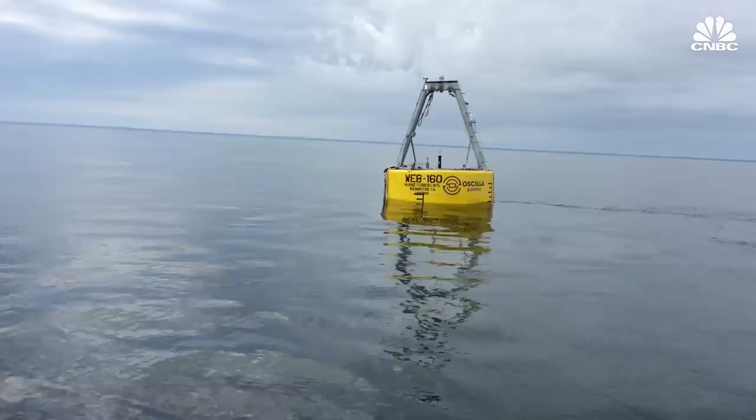As the nation's first full-scale, grid-connected test facility for these technologies, called PacWave, is set to come online over the next few years. PacWave really represents for us an opportunity to address one of the most critical barriers to enabling wave energy, and that's getting devices into the open ocean.

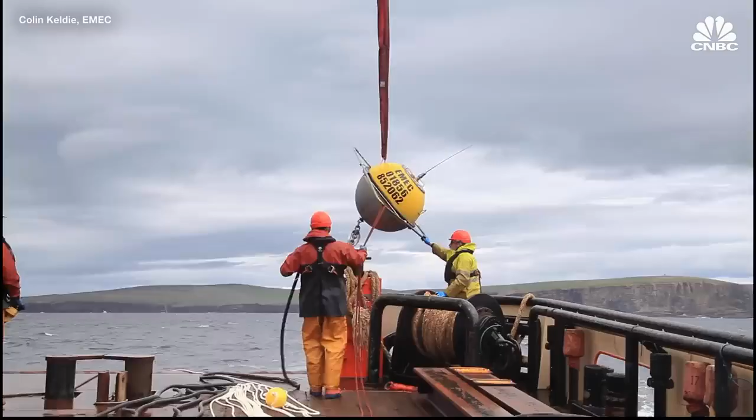That will help the U.S. catch up with its European counterparts, who've been testing wave energy devices off the coast of Scotland since the early 2000s. But while many prototypes have been developed, it's still unclear what technology will prove viable for grid-scale electricity production. There are just this vast array of approaches to turning oscillatory motion into ultimately electrical power.

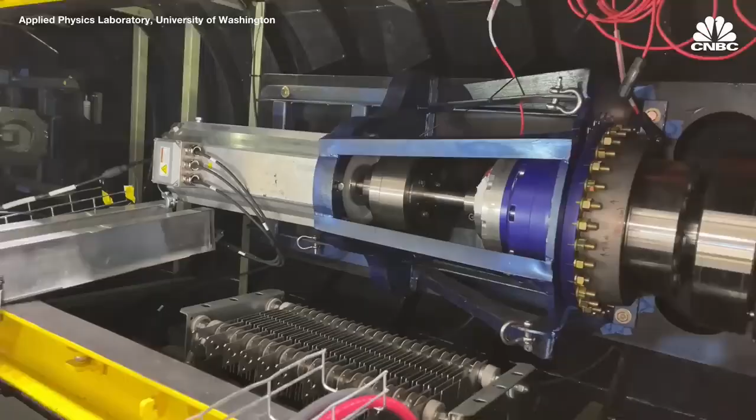We spoke with a number of companies pursuing different technologies and learned how this emergent energy source could help us transition to an all-renewable world, if we can get it to work at scale.

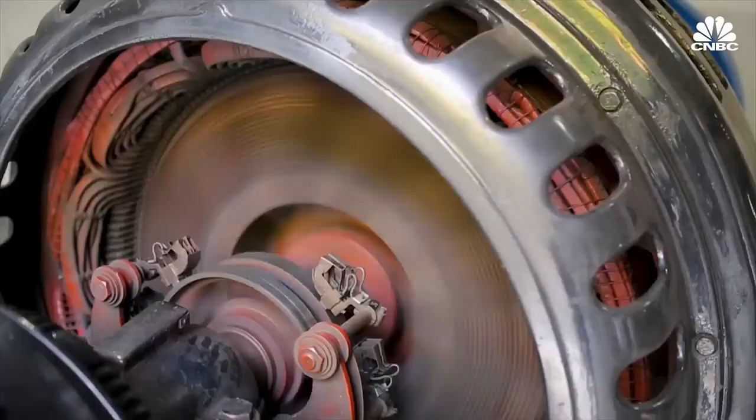Besides the fact that the ocean is a rough environment, the very nature of waves themselves means harnessing their energy is much less straightforward than, say, wind or hydropower. Winds and currents, they go in one direction. It's very easy to spin a turbine or a windmill when you've got linear movement. The waves really aren't linear, they're oscillating.

And so what we have to be able to do is turn this oscillatory energy into some sort of capturable form. There are a number of different ways to do this. But generally speaking, devices work by harnessing the up and down, back and forth, or rotational motion of the waves to drive a generator to create electricity.

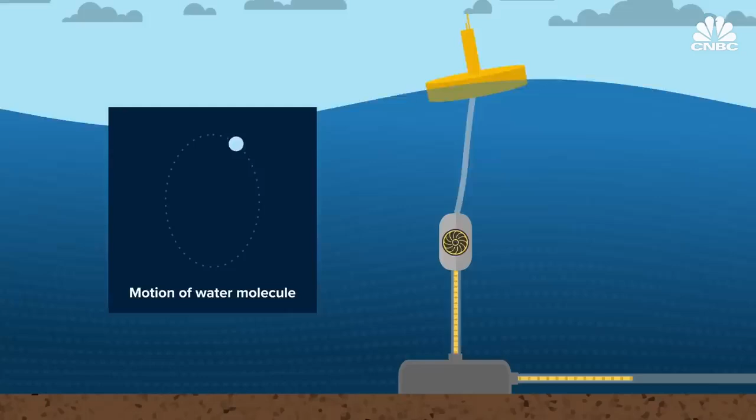Some companies are now attempting to harness energy from multiple different modes of motion. And what we don't really know is which of those is best in a real-world full-scale system. One technology might work really well for large, slow, open ocean swells. Another technology might work really well for choppy or wind wave kinds of energy.

If wave energy proves to be scalable, it has the potential to be an excellent complement to wind and solar, since it can produce energy 24/7 in all weather conditions. And while wind and solar production peak in the spring and summer respectively, waves are more powerful and consistent in the winter. But the infrastructure required to scale up any of these systems and connect them to the power grid is complex and expensive.

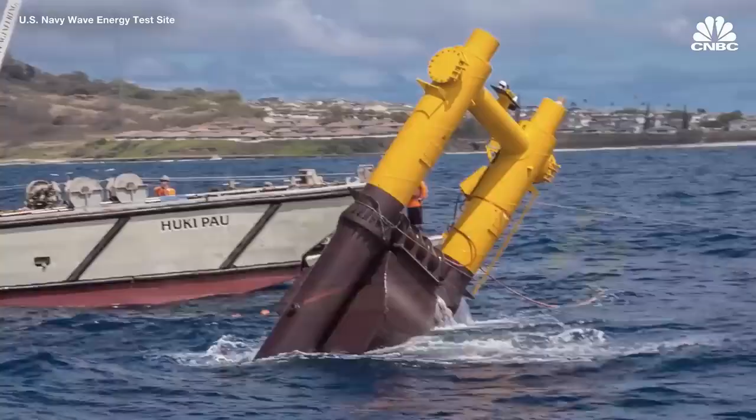So if you're building, let's say, a wave energy plant offshore, you're going to have to build your mooring and anchoring systems out offshore. Cables will then go from your wave energy converter down to a subsea cable where you probably have a sort of a junction box where you might plug 10, 20, 50 devices in with one larger export cable that will then run along the seafloor.

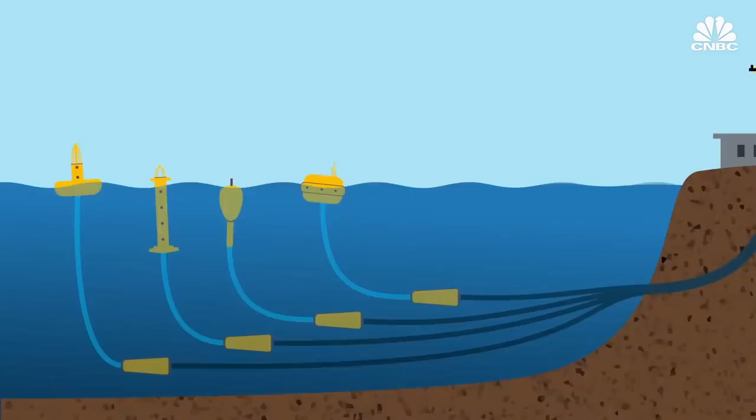But when it gets close to shore, you'll have to drill it under the seabed and under the surf zone because that's a very active environment, and then pop up in a location on shore. PacWave, the Department of Energy-funded wave energy test site off the Oregon coast, is building this infrastructure now.

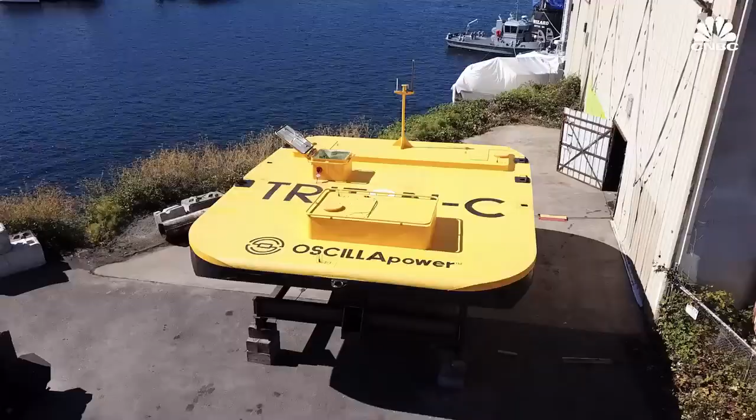It's a collaborative effort between the DOE, Oregon State University, the National Renewable Energy Lab, the European Marine Energy Center, and a host of other marine energy experts. The facility is fully pre-permitted, so companies can trial their prototypes without concern about regulatory delays. The Department of Energy has funded 8 different companies to start deploying at PacWave beginning in 2024, and we can't wait to have them on site. This is really a seismic shift in the wave energy community.

In the U.S., the DOE has been funding marine energy for about a decade, a category which not only includes wave power, but also power generated from currents, tides, and temperature changes. During that period of time, we've spent probably around $500 million or so on marine energy. But this year, we actually saw a record amount for our office, specifically for marine energy, $112 million in 2022. And this also includes an additional $110 million from the Bipartisan Infrastructure Law.

And at the beginning of this year, the DOE announced $25 million in funding for 8 wave energy projects, which will comprise the first round of technologies to be tested at the PacWave facility. Of the 8 projects, Bay Area-based CalWave received the largest amount, $7.5 million.

A small-scale version of CalWave's device recently returned after a successful 10-month deployment off the coast of San Diego. Yeah, the device we're testing at PacWave will be a larger version of this, so nearly double the size and 10 times the amount of power. And so this unit specifically was able to power about 30 households. The X800, our megawatt class system, produces enough power to power about 3,000 households.

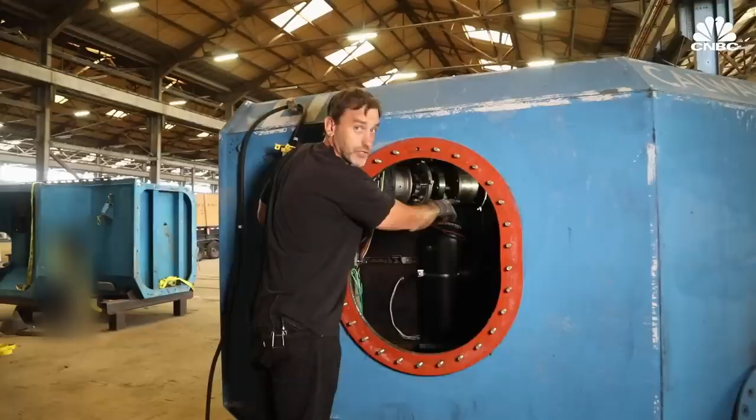So our target is 20-year deployments at sea, and I think that's very achievable with maintenance interventions about every 4 to 5 years. CalWave's tech is classified as a submerged pressure differential device. It operates completely below the surface of the water, and as waves rise and fall, surge forward and backward, and the water moves in a circular motion, the device moves too. Dampers inside the device slow down that motion and convert it into torque, which drives a generator to produce electricity.

Lehman likens it to how electric cars recharge when braking. As the electric car goes downhill and you put on the brake, it would produce power. And so the waves move the system up and down, and every time it moves down, we can generate power. That oscillating motion we can turn into electricity, just like a wind turbine.

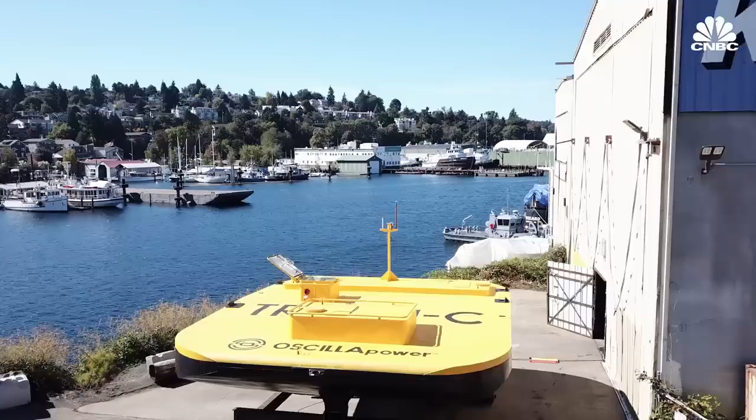Seattle-based Oscilla Power was awarded $1.8 million from the DOE, and is getting ready to deploy its wave energy converter off the coast of Hawaii at the U.S. Navy Wave Energy Test Site. While this facility is smaller than the planned PacWave facility, it's currently the nation's only grid-connected site for tech like this. The system that we're deploying in Hawaii is what we call the Triton C. This is about a third of the size of our flagship product. It's designed to be 100 kilowatt rated, and it's designed for islands and small communities.

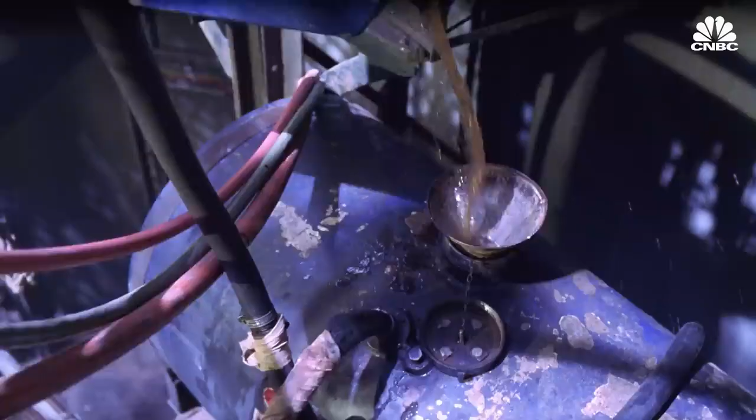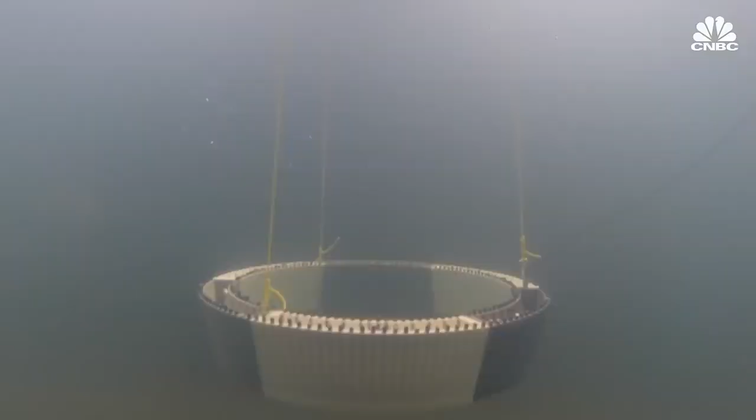Nair and many others are excited by wave energy's potential to generate electricity for remote regions, which rely on expensive and polluting diesel imports to meet their energy needs. Oscilla Power uses a technology known as a two-body point absorber. Part of the Triton C floats on the surface and moves with the waves in all directions, up and down, side to side, and rotationally. Underneath the float hangs a large ring-shaped structure, which stays relatively steady, thus generating force on the lines that connect it to the float. That force is then used to rotate a gearbox to drive a generator.

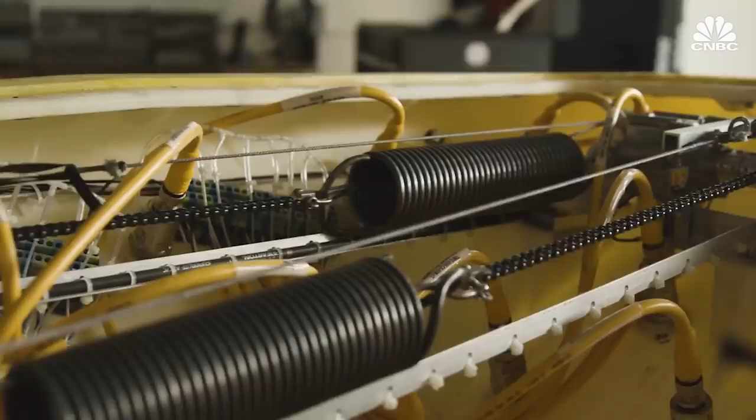So under very weak waves, we get a lot of pitch and roll motion in our system. At very strong waves, we get a lot of surge motion, and in the most prevalent wave climate, we get a lot of heave motion. That's up and down motion. So across all of these, the system certainly moves enough for us to be able to capture energy efficiently across a wide range of climate. Oscilla Power plans to deploy a larger megawatt-scale device in India in 2024, and then move on to testing at PacWave.

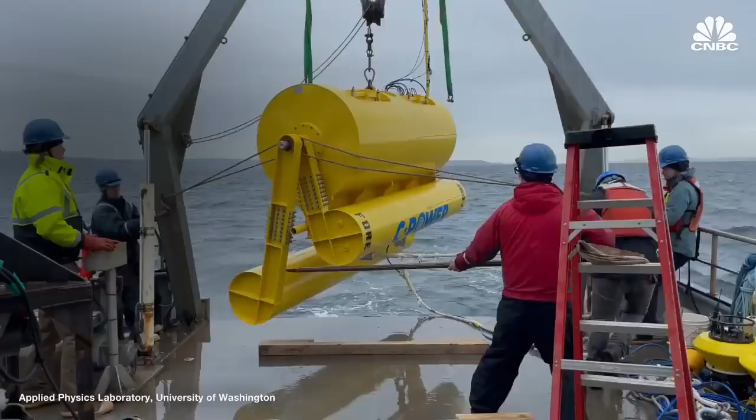The DOE also awarded Charlottesville, Virginia-based company C-Power over $4 million to develop and test its grid-scale wave energy converter, the Stingray, at PacWave. But before that testing takes place, the company is focused on commercializing its smaller-scale system, the Sea-Ray, designed for lower-power applications. Think about sensors in the ocean, research, mid-ocean data gathering, maybe it's monitoring or inspection. The next step, Lesemann says, is powering ocean robotics and operating equipment. And then you think about diesel genset replacement for island power.

Then we start to work our way towards charging networks for autonomous surface vessels, and then eventually to terrestrial to grid applications. The Sea-Ray consists of two floats and a central body, the nacelle, which contains the drivetrain. As waves pass by, the floats bob up and down, rotating about the nacelle and turning their own respective gearboxes, which power the electric generators.

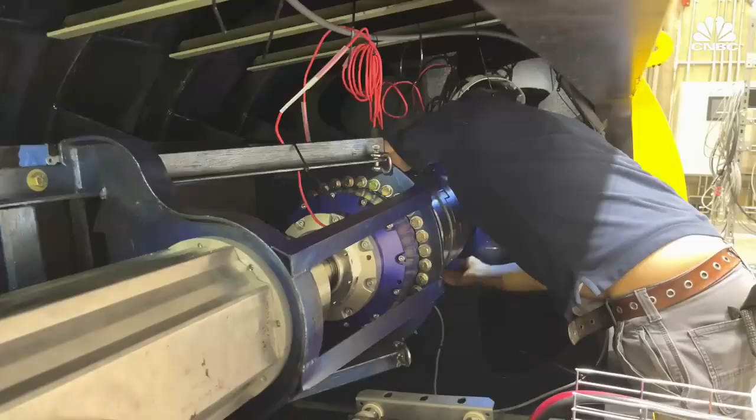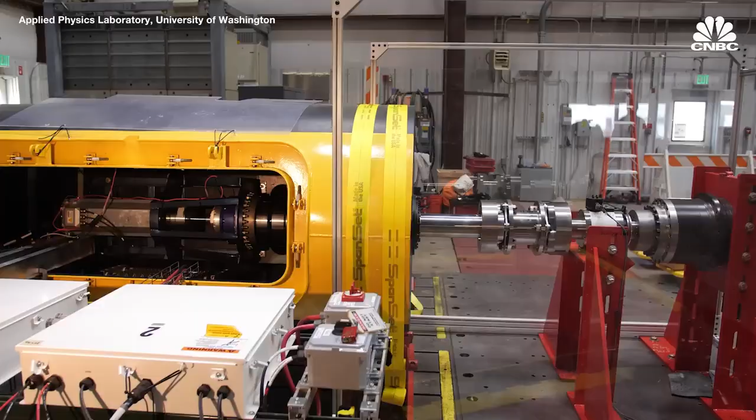We have a Sea-Ray that will be deployed off the coast of Hawaii this fall, and that's a 2 kilowatt version. We've got a number of customers that are involved with us. Saab is one, who's one of the global leaders from a subsea robotics perspective. Biosonics is another with a static data gathering system. After these initial applications, C-Power will work on scaling up its Sea-Ray so that it's compatible with satellite communications and deep water deployments, before building a 200 kilowatt Stingray to test at PacWave.

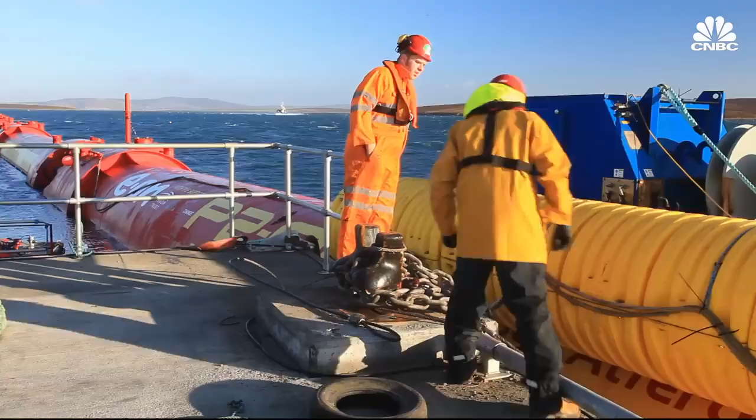The European Marine Energy Center, or EMEC, was the first test site in the world for wave and tidal technologies when it opened in 2003. We've had something like 35 different devices in the water from 22 different companies from, I think, 11 different countries. Some of those include Finnish company Wello Oy, which produced power for the grid in Scotland during its 2 deployments at EMEC, and has subsequently been deployed in Spain, and Scottish company Pelamis, which became the first offshore wave energy converter to produce power for a national grid in 2004. It was also the first to be purchased by a utility company, though financial troubles ultimately forced the company to cease operations.

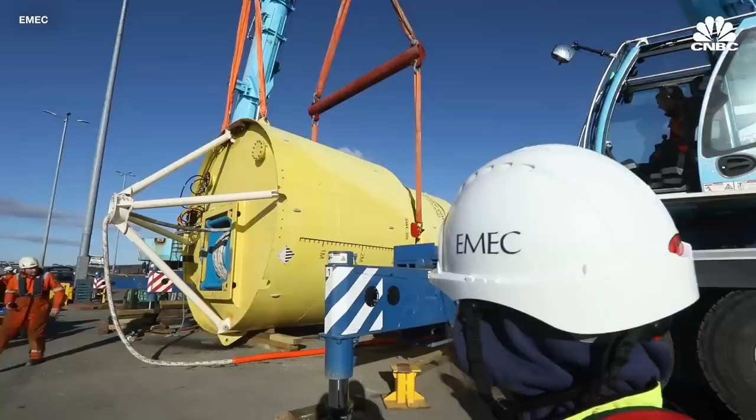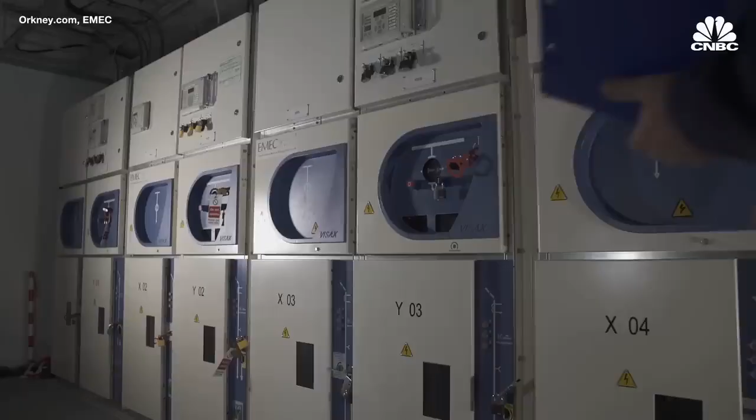While EMEC has seen its share of successes and disappointments, no company has yet commercialized a grid-scale wave energy converter, so Kermode is more than happy to see more players and more testing facilities popping up. We firmly believe that this is an international endeavour, and we're not going to win this just because some people on a small Scottish island managed to crack this. This will be dealt with because the scientific and technical community has really put its shoulder to this and found a way to make it work.

But while PacWave and EMEC are focusing on testing offshore devices, one Swedish company, EcoWave Power, thinks it will be quite a while before these complex devices can reliably produce power. I would like to see more companies focusing on easier projects that will give the population, the investors, the government, the safety to say, okay, now it's safe to legislate, now it's safe to invest, now it's safe to believe in wave energy. That's why EcoWave Power is installing onshore devices on breakwaters, piers, and jetties.

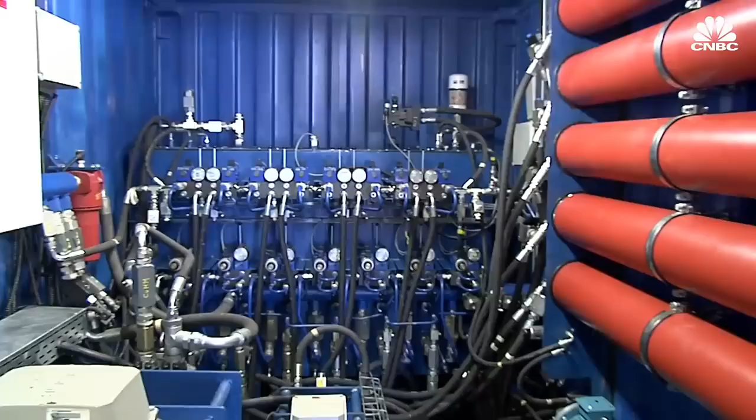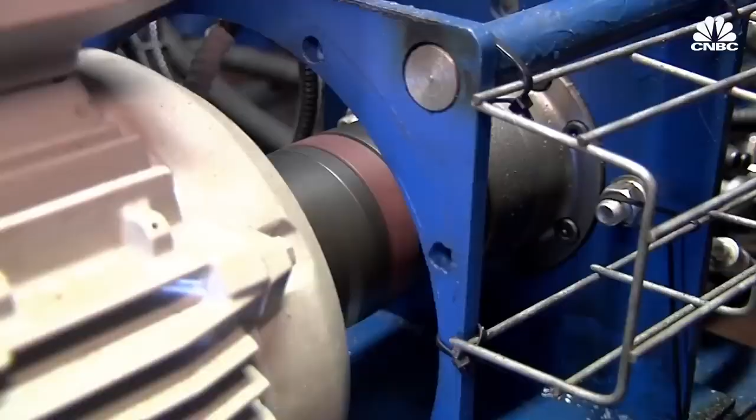The only thing in our technology that is in the water are the floaters, which belong in the water. All the expensive conversion machinery is on land, just like a regular power station. So basically, this enables a very low installation, operation, and maintenance cost. As a floater moves up and down with the motion of the waves, it drives a hydraulic piston, which compresses fluid that's then stored in an accumulator. When the fluid is released, it turns a hydraulic motor, which powers an electric generator.

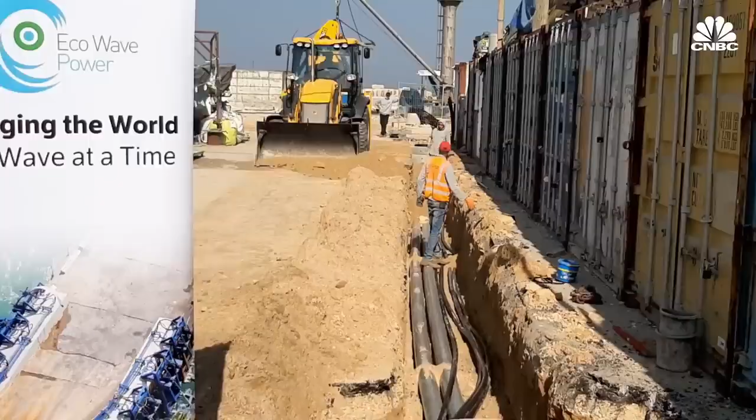While nearshore and onshore waves aren't as powerful as offshore waves, Braverman says that current technologies aren't able to fully take advantage of that extra energy potential, meaning the energy produced from her company's floaters is on par with the offshore competition. Eco Wave Power produced power for the grid in Gibraltar for 6 years, powering around 100 homes with its 100 kilowatt system when operating at peak efficiency. The company is finalizing another 100 kilowatt grid-connected station in Israel and has signed an agreement to install its devices at the Port of Los Angeles, starting with a 100 kilowatt installation and hoping to scale to 15 megawatts, which could power about 15,000 homes.

There are still many unknowns when it comes to wave energy tech, including whether costs can fall enough to become competitive with fossil fuels. In order for marine energy to be competitive, we need to be at cost parity with solar and wind or offshore wind. So really driving at that less than 6 cents a kilowatt hour. But that's a long way away. The projections for the levelized cost of energy for the wave energy devices are 60 cents, 80 cents, $1 per kilowatt hour. Wave energy has really struggled to get solid deployment at the moment, mainly, to be brutally honest, because hydrocarbons have been so cheap.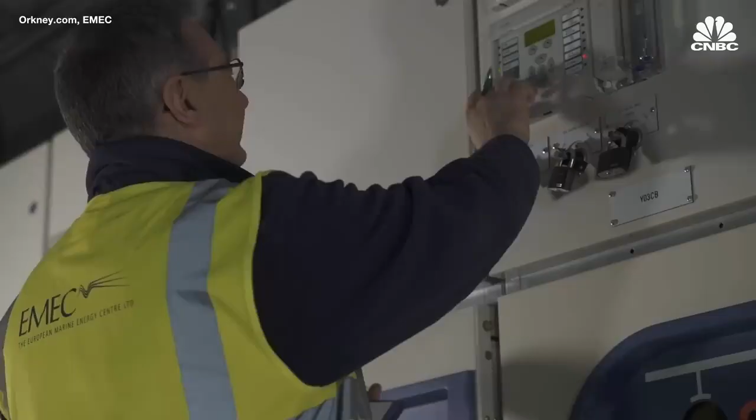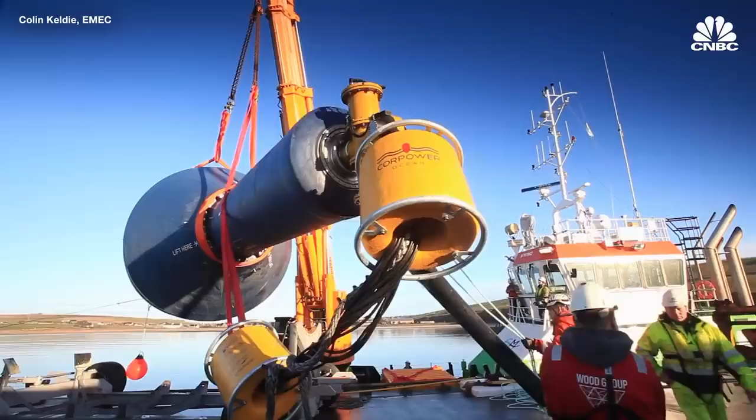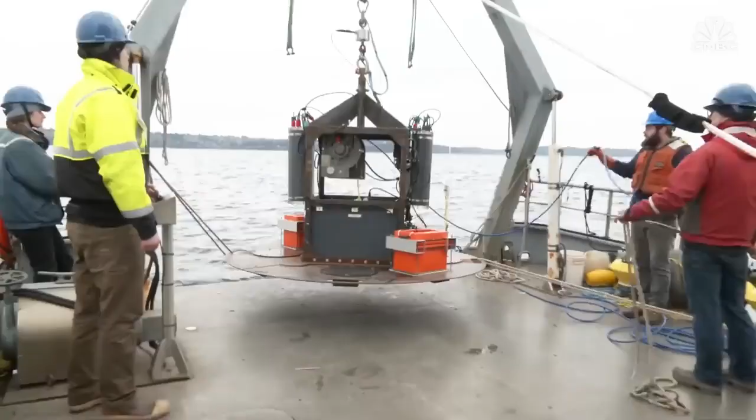And while there are ongoing efforts by the DOE and the companies themselves to monitor the impact of their devices on marine ecosystems, it will take time to get a full picture of the impact. Really, this is going to have to be something that we learn as we put systems into the water. But we're funding environmental monitoring, funding work to really understand the interaction of species with deployed systems, and we take this very seriously. Questions about potential environmental impacts could delay the permitting process as companies move beyond testing and attempt to commercialize. One thing that could make permitting easier, though, is if there's convergence around a particular design principle. There are different applications that require somewhat different approaches, but I think for the mainstream, you will see some form factor convergence. Right now, though, it's far from clear what technology will rise to the top for grid-scale electricity generation.

But in the meantime, experts say that there are many exciting low-power opportunities. Data gathering, subsea robotics, operating equipment, that's today. That's ready to go today. Next, many point to places in the Arctic, like Kodiak Island in Alaska, as potential early adopters of the tech, since there's so little solar power there in the winter, and the community relies on expensive diesel generators for power. Estimates vary for how long it will take before we see wave farms providing power to the mainland, but most agree that it won't be this decade. So we have a goal of setting about 1 gigawatt of power by 2035. And we really see that as the first opportunity for wave energy to come online to serve the nation's grid.

Scale-up will largely depend upon continued government support in the U.S. and abroad. The recent passage of the Inflation Reduction Act, which includes $369 billion earmarked for clean energy and climate change mitigation, has many optimistic. But Kermode says that globally, we need to be even more aggressive about getting these devices in the water. It does take time to do this. The question is, do we have time? And so do we need to get at this harder than we are at the moment? And I would suggest we really, really do need to be quite aggressive in what we're doing and really push hard.